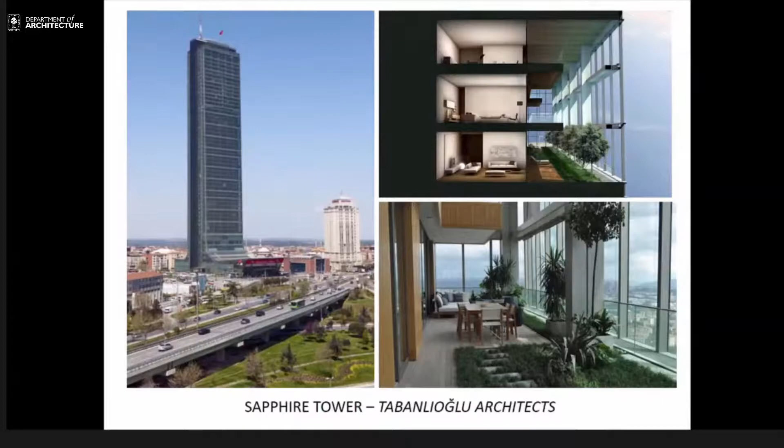And even if you are on the 30th or 40th floor, you can plant and vegetate something there too. That double facade also has the opportunity to keep the building warm in wintertime and a little cooler in summertime. You can check this on the internet or the architect's website.

The other one is maybe one of the first big sustainable and famous projects in Turkey, but not so many people know about it. Its architect is Alejandro Zaera-Polo. At that time, while he was designing that building, the office name was FOA, but then they split up and I think he established a new office - I don't know its exact name, it's a combination of initials, a very interesting, weird name.

This is on the Anatolian side of Istanbul, the Asian part, and it's a shopping mall center. When he designed it, it wasn't common to make open shopping malls in Istanbul, because when we talk about shopping malls we all have an image of going inside a really big building with all indoor facilities and spaces. But for the first time, he experimented with making the shopping mall something like a public square. This is why we also call it by the name square shopping mall - Meydan means a square, a public square in Turkish.

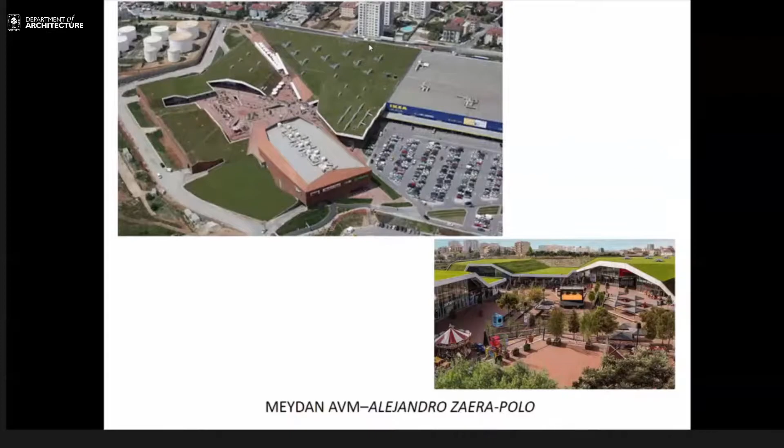Okay, the other and maybe the last example of a famous project in Istanbul especially is Küçükçekmece municipality building. It's a municipality building, an office building. Küçükçekmece is one of the districts in Istanbul. Mi'ar architecture are its architects. And also we call it the first sustainable governing building in Istanbul, also maybe in Turkey, I don't know.

Its aim, while the architect was designing this one, he tried lots of passive systems by putting some double facade to control the sun shading, the green roof you can see here, and there are lots of active systems also. Maybe after me the other representative is going to explain something about maybe LEED or other stuff.

I have just checked while I'm checking the poster, there is also a title about LEED or something else. It's one of the projects we are thinking about, one of the famous ones in Istanbul. Okay, actually this project is famous, and it seems really sustainable by just checking its green roof or double facade or other stuff.

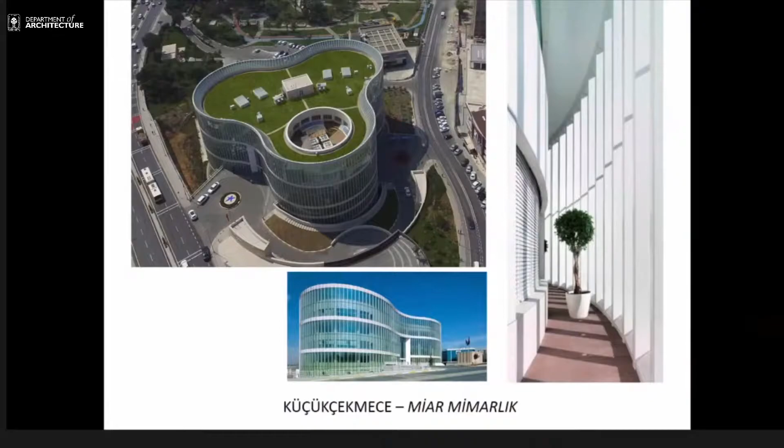But when we go back again, sustainability should actually always have three branches: to sustain the social perspective and economic perspective also, apart from the environment perspective. Actually, as a group of architects, we call ourselves COFACT architects. We are trying to use those three branches in our projects, in our experiments.

Actually, there is also a very good platform to practice our experiences, and that is always about competitions, actually, national or international competitions, sometimes invited competitions.

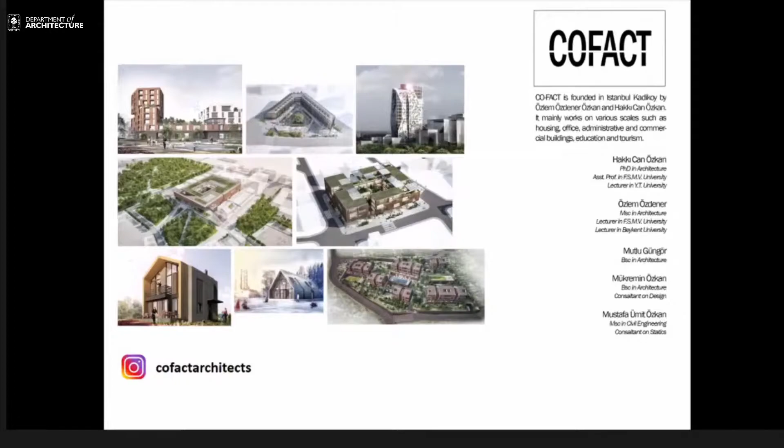Okay, I'm going to right now explain about our perspective on sustainability. While we are thinking about it, we always try to find, according to the project, according to the demanding project, what kind of branches of that scheme, that diagram, we can implement in the design.

And while thinking about it, there are some concepts we have found, and we call them flexibility, modularity, economic development, publicity, bioclimatic design - where sustainability is one we are interested in so much - and energy efficiency maybe the last one.

When you make your project flexible, while you're designing it flexible, then its lifetime goes longer, actually, because it can turn into something else. So it can sustain itself with new situations, maybe according to the seasons, maybe according to political situations, or even the function can be changed. This is why flexibility is important for us.

Modularity is also very important because it's directly related to prices, estimated costs, and the production. And also economic development is one of the important parts, because if a project cannot manage to be economic, it couldn't sustain forever. These kinds of concepts, actually, we are always thinking about while we're designing projects.

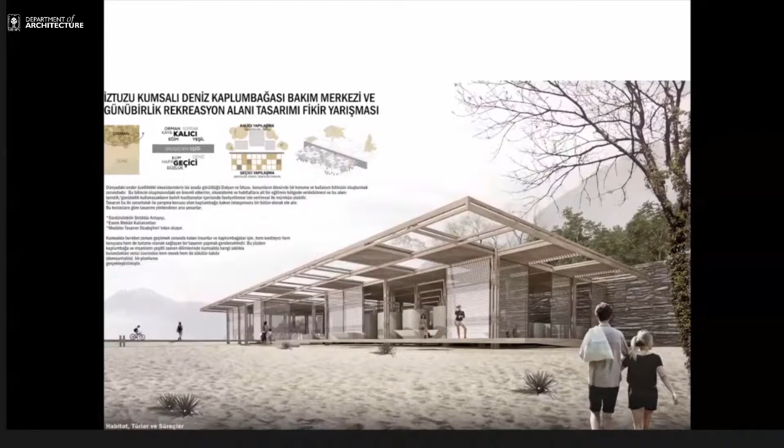But the main challenge is the place, the area that was given is between a hill and the beach side. It's something like a really interesting ecosystem part. And we thought that if we have something like a junction area, there is really a straight line that cuts through three different ecosystems.

So we said that in that design, in the hill part, we're going to put the hospital with all its restricted areas - you cannot change it, actually, because it's a hospital. But on the beach side, there is something like a visitor center, and it should be founded on the sand on the beach. And because of the seasons, because of the time of using the beach, it should be transformed, because summer is very crowded in that area, especially since some people also come here for tourism to use the sea and the sand and the sun.

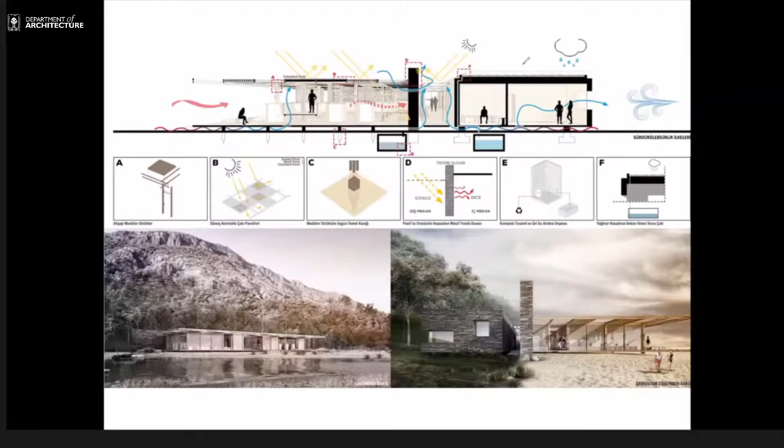But in the wintertime, some activists come here for events about the tortoise. Our proposal is about proposing a very flexible visitor center.

The hospital's main material is stone, actually coming from a very close stone quarry. On the beach side, we use very light material as structure, and all cladding is wooden material, which is very flexible. It can change, transform, and move the whole panel walls.

It changes according to the season and according to usage capacity. Especially in winter it gets much more compact because fewer people visit the facilities, but in summertime it can extend with different functions. This gives it the opportunity to make its lifetime much more sustained. Actually, this is the main theme, main idea of the project.

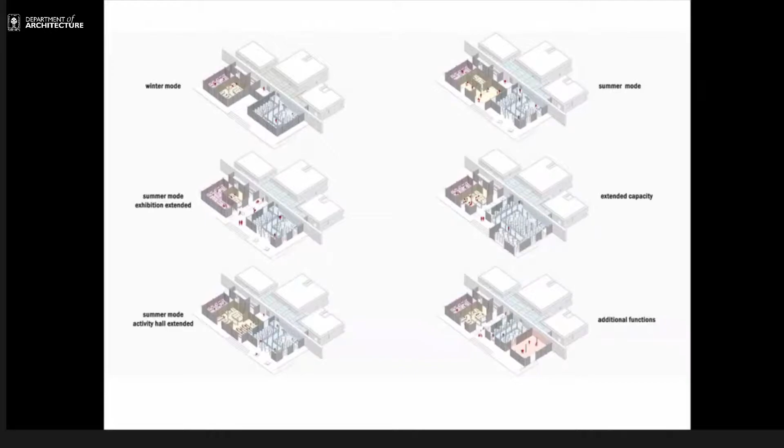The other topic we think about so much is modularity, because we believe it comes from manufacturing and producing the materials, and it's also very strongly related with economical development. This is one of the important points we always think about.

Here is a kindergarten project we designed for the Istanbul municipality, and we are still negotiating about building it in a different district or region of Istanbul. Sometimes other cities' municipalities send invitations to build that idea in their cities too.

Actually, the main demanding question and problem is like that: the municipality wants us to design a kindergarten, but the problem is they're going to build it maybe hundreds of times in different regions of Istanbul.

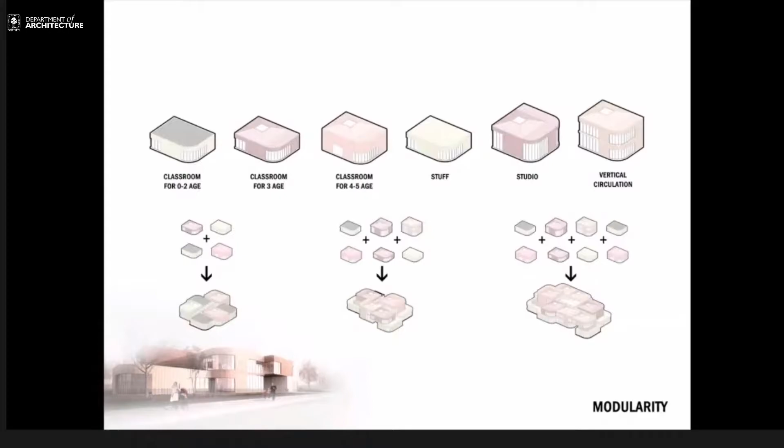And then we established some examples. There are three examples of all different capacity kindergartens.

One of the important concepts we're also talking about... I'm also checking my time. I think this can be the last example I can explain. If you wonder about our practice, you can follow our website or Instagram account.

For economic development, actually one year ago we won an invited competition in Libya, in Tripoli, to make the first indoor garage, indoor car parking building in Tripoli, especially in the whole of Libya. The problem was they just asked us to create a garage building, a car parking building, with maybe a corner of the building used as an office or other space to gain much more money by renting or selling office spaces.

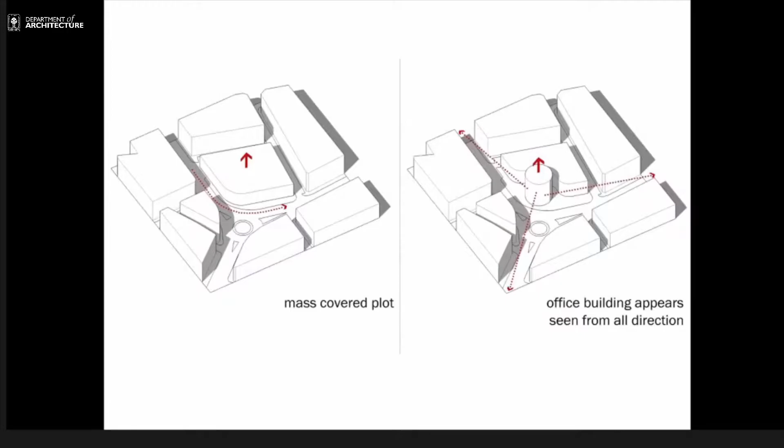So the one you see right now is from when we were launched, when we were acknowledged as the first winner, and our scheme is called Nagara Rimba Nusa.

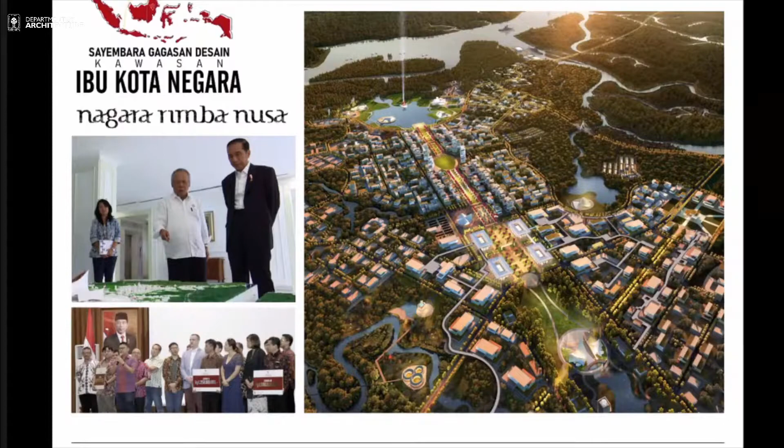Nagara stands for the city, or the town, and the government. It actually comes from Sanskrit. I don't know how far Sanskrit reached to Turkey or not—it reached up to India, but I don't think it goes that far to Turkey. So it is a representation of our presence of government, presence of identity and character.

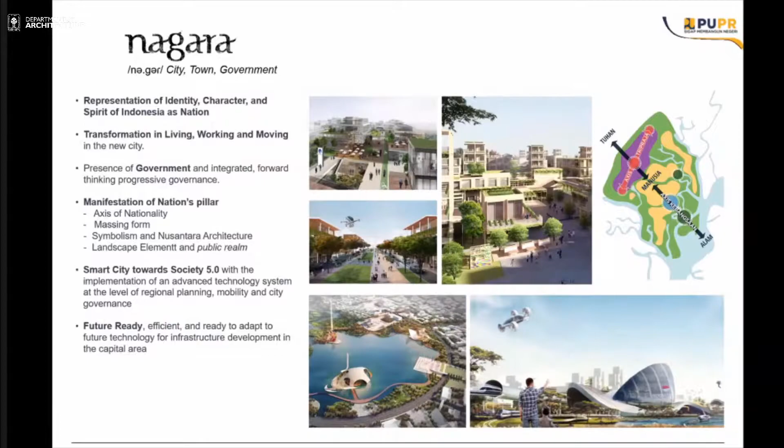And then we have the second word, Rimba. Rimba means a dense forest and a jungle. Why do we call it Rimba? Because we are building in Borneo, and I think you probably know Borneo better than other islands. Borneo is where, you know, probably the movie King Kong—the last edition of King Kong—the King Kong came from this island.

It's actually densely forested, so it is very important for us to address the fact that you are building in the middle of nature. Although the site that we are choosing is not necessarily a primary forest, it's actually a production forest. So a lot of our narratives has to be derived from that.

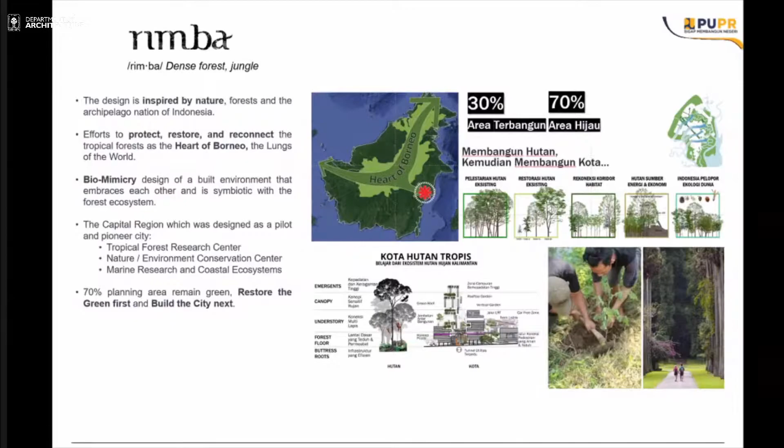And the third word is Nusa. Nusa means archipelago and island. Us, Indonesia, as the largest archipelago country in the world, and I think we are proud of it. It is part of our identity, and it is also part of our symbol of the diversity that we have, that really needs to be encapsulated in our plans.

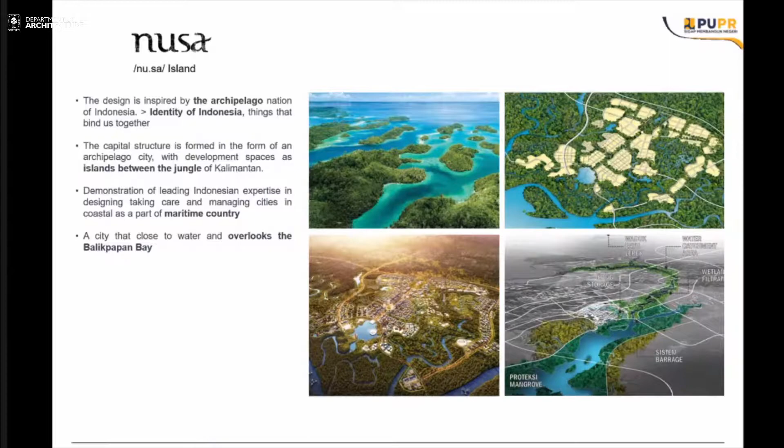And we really want to have this spirit of diverse and also naturalistic, and we try to capture that into our plan. So that Nagara Rimba Nusa, in the beginning, we enter the competition with showing that several of our plans shows the scale and also the places where we can identify our national identity.

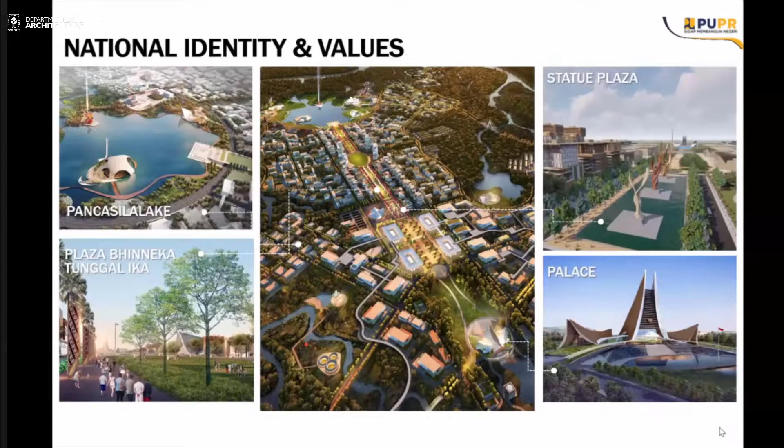We put in, we have the 5 principles, we call it Pancasila, which is the sort of like the guidelines for us when we live up to our values, including the belief in one God, and then we also have the humanity, we have also the unity, we have a democracy, and we have also social welfare for people, which we put it into a lake.

There's a certain area here where we have a lake that we can collect all the values into something that we can relate as a place. So it is trying to create identity, a national symbolism, but then we try to create a placemaking to it, so people can really relate to what we are talking about.

And we also have 17,000 islands, and we have a few hundred languages and also thousands of tribes, which we need to represent those diversities into a place that we can unite ourselves. That we have a word called Bhinneka Tunggal Ika, unity in diversity. So we create a plaza that creates that kind of notion, which we put into one of the axes.

And then we have also the cultural plaza of the statue. We have a lot of our art craftsmen making very excellent statues in Indonesia. A lot of people from Bali are known for this craftsmanship. We want to display it into a space, a place that we call Plaza Adikarya, or the masterpiece plaza, where we can put in our highest form of art.

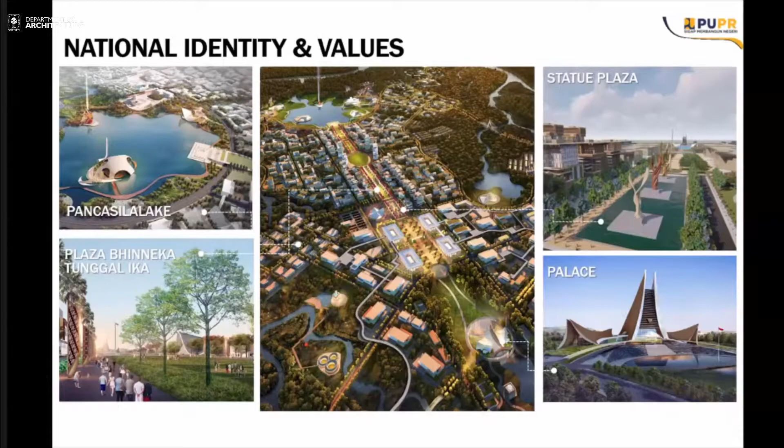And also, of course, the palace. The palace, we still try to kind of toy with the idea of what our palace would look like. Is it going to look like the White House like in America, or is it going to look like the one in Astana, the one that looks very much like a palace?

But we think that the Indonesian palace for the Indonesian country, because we have very distinct roof looks. The roof in Indonesia, we have thousands of kinds of roofs, but they all have a very unique roofscape, which we think we cannot pick just one of them. We want to use this sort of appreciation, the fact that we have a variety of roofs, but then it needs to be combined together so that we cannot distinguish which one is coming from where.

So you know that a roof from Sumatra, roof from Papua, roof from Lombok, or Java is very different from each other, but then it is something telling us that this is Indonesian. So yeah, this is part of our first original journey, but we will show you later what the next development is after that.

So the second message after the nationalism or this ideal symbology is the principle of sustainability. One thing that we want to do is not to just build the building first, because the first thing that normally any development will do is create a road, create a platform for development, create a building, and then you start to remove a lot of the nature.

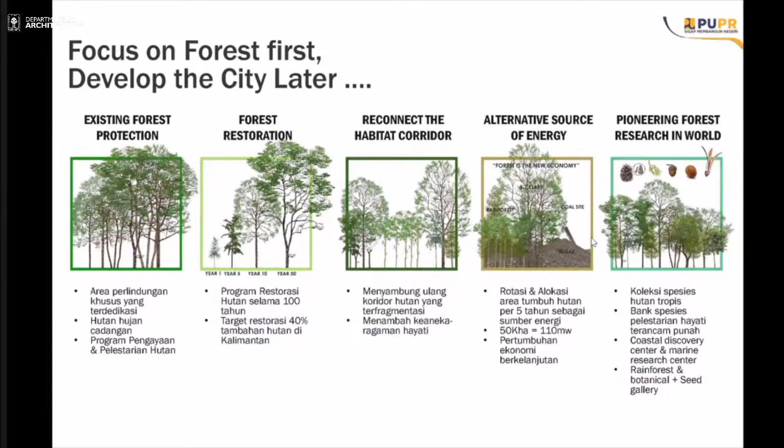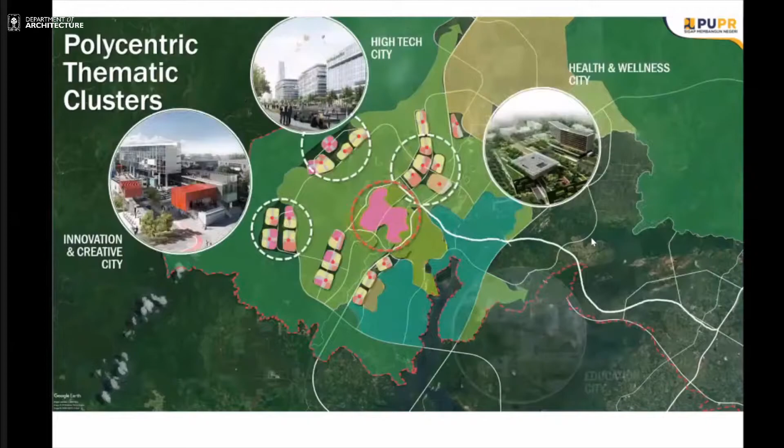So before going too far, thinking about where is the city, where is the plan, where is the capital building, where are all the houses or the business CBD, etc., we look at the site, which is natural or green, and we want to create a theme for the forest first. So we try to create a biomass forest, protected forest, which is already there, which we want to emphasize; natural forest, restored forest, botanical garden, mangroves. These things are identified first, and we set it up for 70% of that area to be more in the forest area, which is 126,000 hectares. We only try to develop 30% out of it, where we only build where it's necessary and relevant, and we don't want to scatter it all over the place.

We want to create what we call polycentric thematic clusters. We don't want to create sprawling. We combine them into a polycentric sort of accumulation of city, but interconnected into satellites, and each is connected by road and public transport. We try to have 5 satellite clusters, spanning innovation, high-tech, wellness city, education, and sports city, where the one in the middle is our government center.

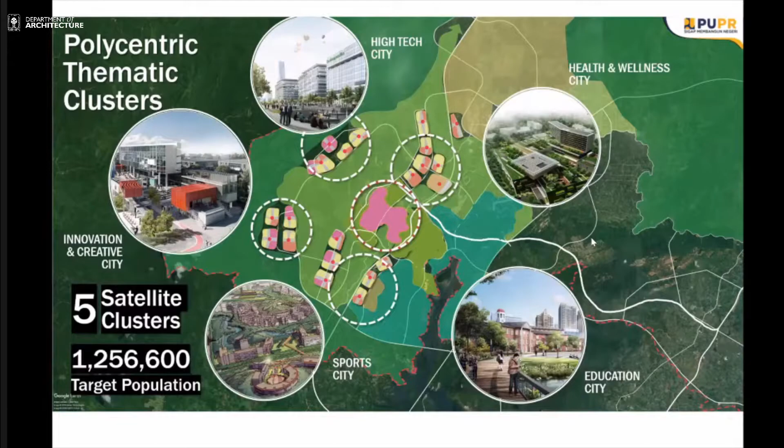With this, we have a 1.25 million target population. This area is actually the same size as Jakarta, but we are doing it the opposite way. Jakarta has 11 million people, and 90% of the area is fully built, with only 9% greenery left in the city. Here, we do 70% of the area green and only build 30%, for about 1/10 of the population of Jakarta. So it's going to be lower density, not too high density, but we created a very compact and integrated living environment.

One of the principles we also put into the proposal was what we call biomimicry. We make a hypothesis that if we were to learn from nature and how we can build our city and built environment using the learning lessons from nature, because I think we are now already too far from the wisdom of our nature.

Like for example, a lot of our cities in the past respect what we call the relationship between man, God, and nature, and we don't build too tall. In Bali, we respect not to build taller than coconut trees, and we don't build on slopes because of the potential for landslides. But people tend to forget that. In the modern world, we use engineering solutions to defy the natural state.

So what we try to do now is turn it back again. We look at how the forest gives us certain wisdom. For example, the emergents, the top area, is for us to harness energy. We should probably use our rooftop for PV, photovoltaic, or use some openings for introducing wind and natural climatic conditions.

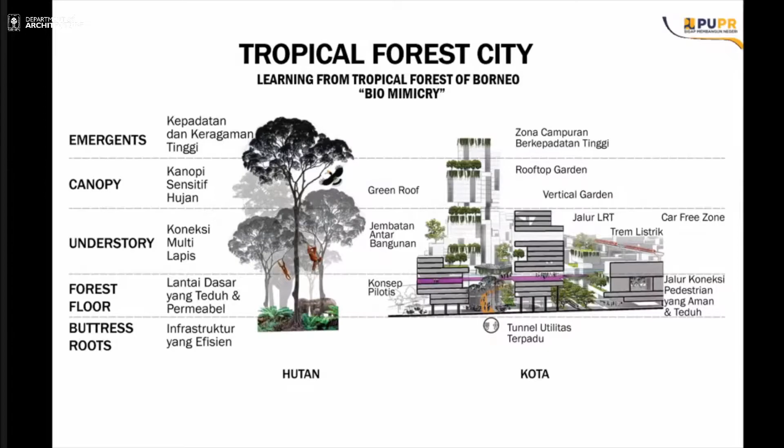So we create what we call a piloti concept, where we build the city slightly raised. This is useful because we're building in an area with very sensitive ground, and we think that by using light structures, we can reduce the impact of the footprint on the ground.

Now this is something I want to show you. For the students at UII, you've already seen the competition boards and some of the scheme, but this is something special for you guys, because we haven't really shown this to anybody yet. A lot of this is actually new, but please take this as confidential, don't spread it around, because I think this will be released soon. For now we're still keeping it in our office.

I apologize that the sequence of this presentation is a little awkward, for those who don't understand where the site is and the city around it. The location of our Ibu Kota is actually near Balikpapan, an oil and gas service city of Kalimantan. Samarinda is another administrative and manufacturing city. The Ibu Kota Negara, or capital city, is located slightly west of the toll road connecting Samarinda and Balikpapan, in the Penajam Paser Utara Regency.

It's mostly greenery, with only a few hundred kampung, or villages, in there. We have a population of about 100,000 currently, but it's scattered across a very vast, big area.

We think that after our national competition, we were asked by the Ministry of PUPR to join a collaborative team with Bappenas, the planning department, and Tata Ruang, the spatial ministry, to identify regional connectivity and create a master plan for development. So Balikpapan, Samarinda, and the capital city will work hand in hand: Balikpapan as a core for petrochemical and logistics, Samarinda as an energy and existing center for East Kalimantan, and the capital city as a nerve center and green innovation center for government, education, health, economy, entertainment, and research.

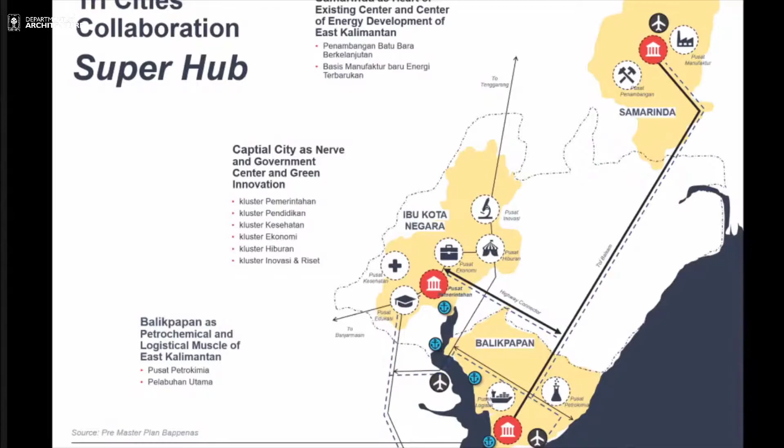So what we have here before is the winning scheme, where our capital city is so near to the water, near to the Balikpapan Bay, surrounded by natural mangrove and waterway. This enhances our notion as an archipelago city, because we want to be close and near to the water, near to the ocean, showcasing our ability to become a nation that is familiar with maritime issues. We are one of the countries that is actually an archipelago, but we are not very strong in our maritime, and we are not really living near the coast.

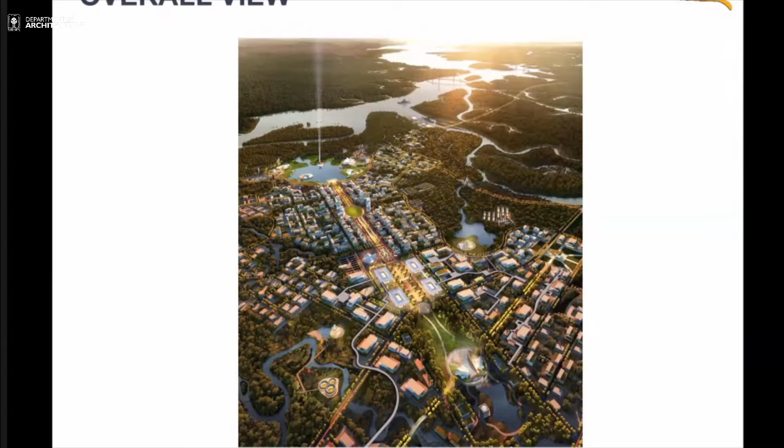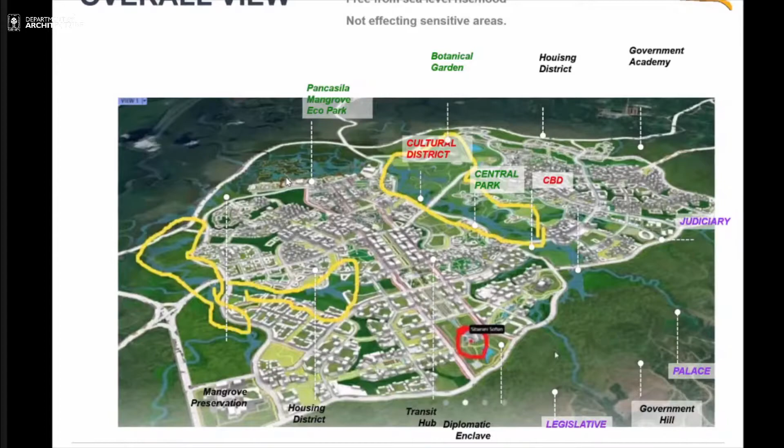But there is a reason for that. One reason is we are asked to move the city slightly to the upper side, because there is an issue of sea level rising, and we are also moving up to an area that is less sensitive, because the area near the coast is apparently mangrove. So we follow that, and we start to move the location slightly to higher ground. This is something I will explain to you more about the current state of our plan.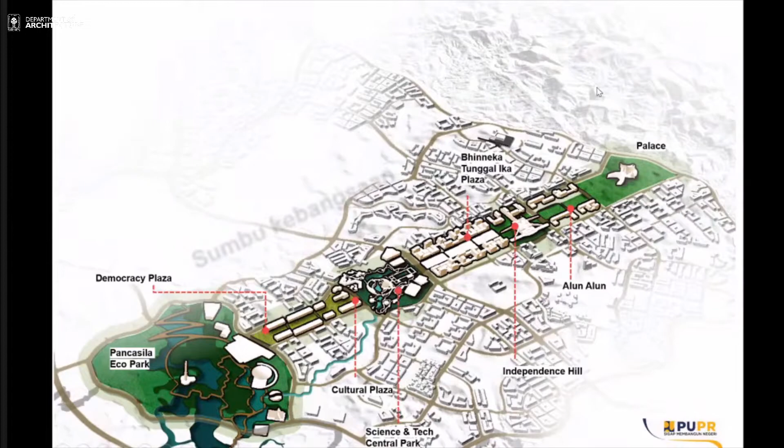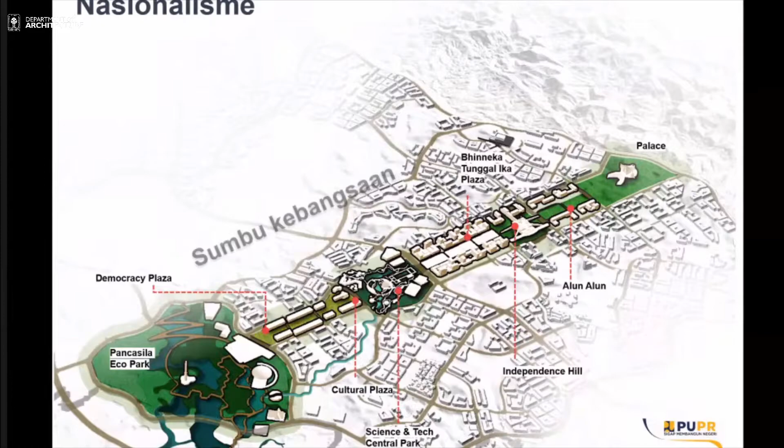So we start with creating the city near the hill, pushing it up to the hill, and then we create, still using the same symbol, what we call the nationalism axis, where we celebrate the relation between God, man, and nature. God is symbolized by the hill. A lot of our cities have this kind of axial relationship, where the axis points either towards a mountain or to the north, symbolizing things beyond man, beyond our power. The middle part is where the human relationship is, what we call the city, where humans try to create a relationship with nature and with God.

Then we have the southern part. Our southern area is actually all nature. So we have this axis where we put all our nationalistic symbols, like the Independence Hill, the Alun-Alun, the Bhinneka Tunggal Ika Plaza, the Palace, and the Democracy Plaza, into a long linear line that ends up at nature, where we celebrate our 5 principles in a setting originally planned as a lake, now as an eco park. We celebrate the relationship between man, God, and nature in this so-called ideology axis.

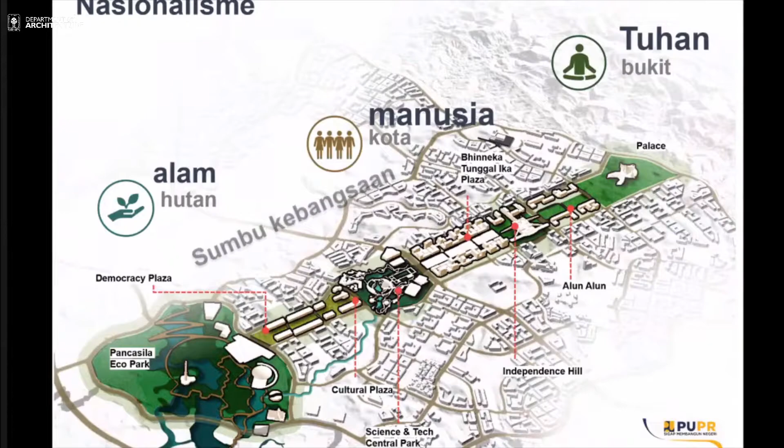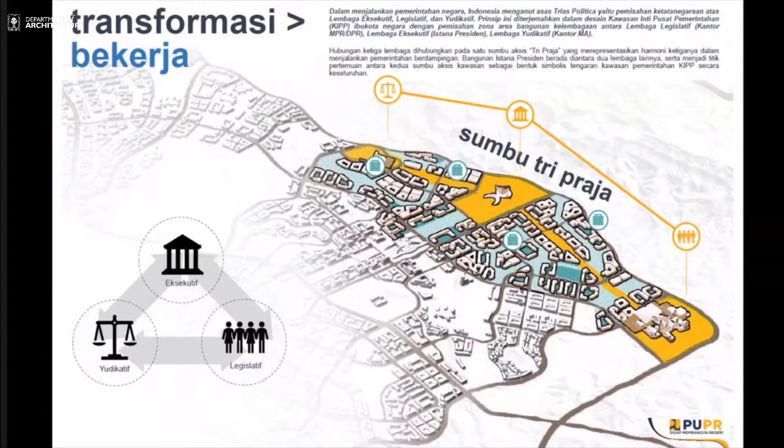And then the second axis that we have is the fact that we call it trias politica - we have executive, judicative, and legislative. This is where the three government arms work hand in hand together with the people's representatives and the judiciary system. And in Jakarta right now, when we want to meet from one minister to another...